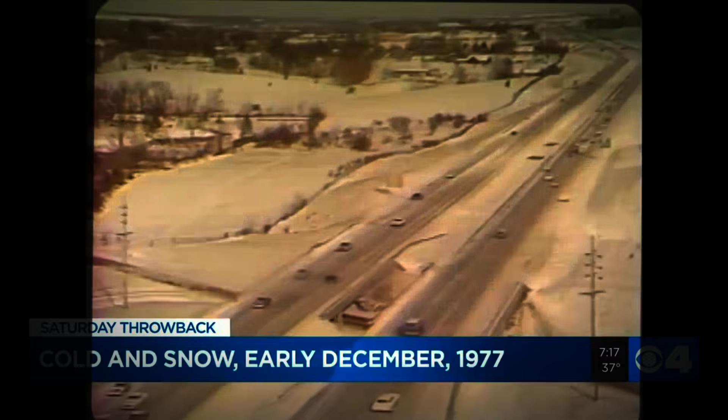In the winter of 1977, a group of homeowners in New Mexico cut their heating bills by more than half without installing a furnace, without adding insulation, and without connecting to any new energy source. They didn't burn less fuel. They stopped needing it.

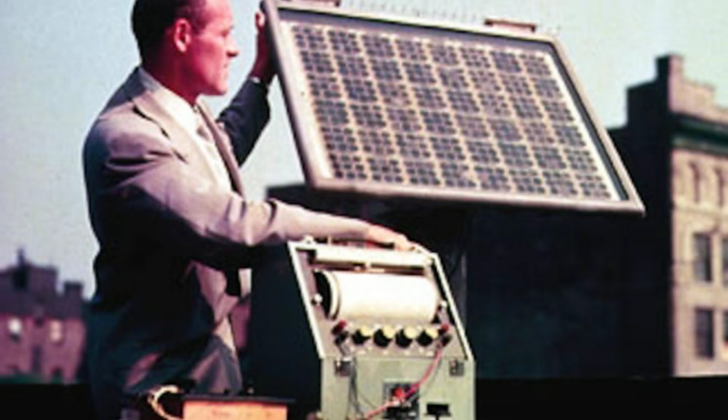The method used nothing more than sunlight, a sheet of glass, and a wall painted black. At the time, it was so effective that entire neighborhoods were redesigned around it. Universities studied it. Governments funded it.

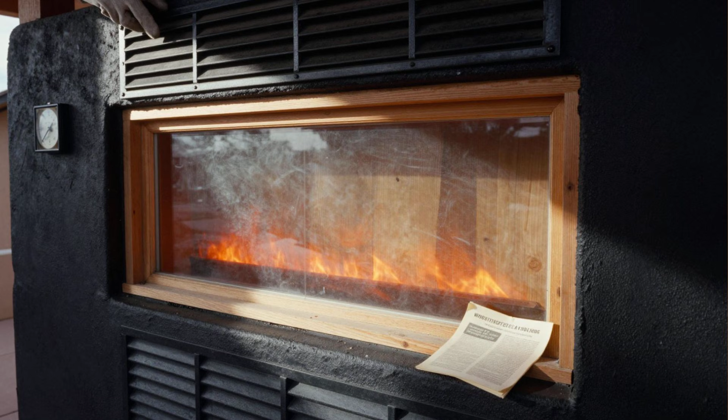Engineers called it one of the most promising energy solutions of the decade. And then it disappeared, not because it failed, but because the crisis that made it necessary ended. This is the story of the simplest heating system ever deployed at scale, how it cut energy use by up to 70%, and why almost nobody is using it today, even though the physics behind it has never stopped working.

And by the end, you will understand exactly how it works, why it was abandoned, and how it can still reduce your energy use today without changing anything about your lifestyle.

Start with the problem that forced people to rethink everything. In 1973, global oil production was disrupted during the oil crisis. Prices didn't just rise, they multiplied. Heating costs doubled, then tripled. Fuel shortages became normal. Lines formed at gas stations.

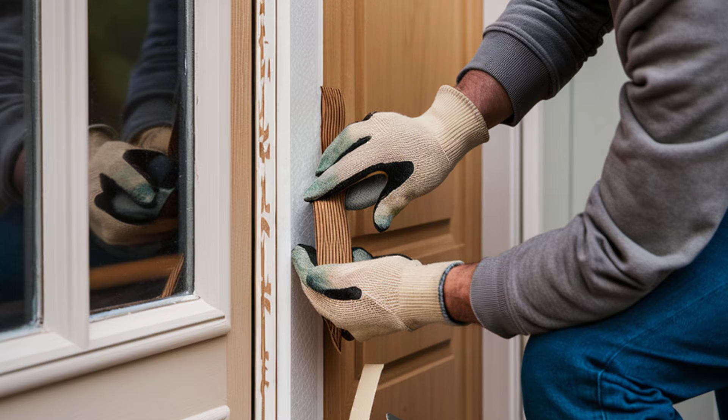In colder regions, families were forced to choose between heating their homes and affording basic necessities. For the first time in modern history, energy stopped being invisible. And when something becomes scarce, people stop assuming it will always be there. They start looking for alternatives, not theoretical ones, immediate ones. Here's what most people miss.

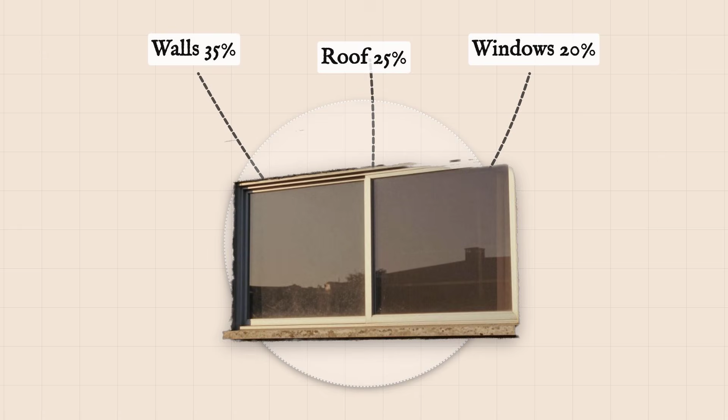The solution didn't come from new technology, it came from rethinking something older than electricity itself: heat. A house loses heat in predictable ways. Warm air rises. Heat moves toward cold surfaces. And most importantly, sunlight carries energy, a lot of it.

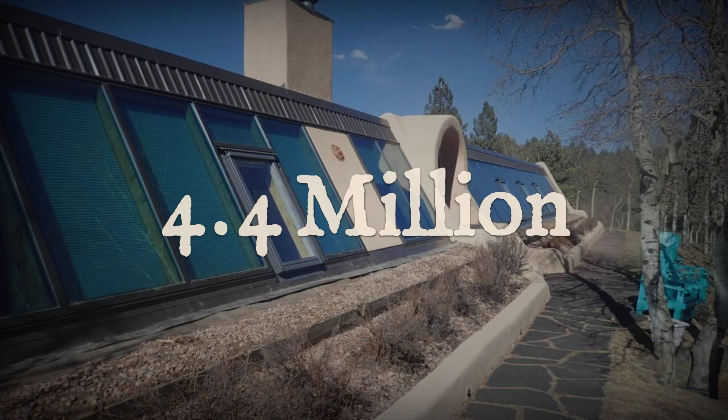On a clear winter day, sunlight hitting a surface can deliver more energy per square meter than many heating systems produce. That energy is free. It arrives every day. And before the 1970s, most homes were designed to ignore it.

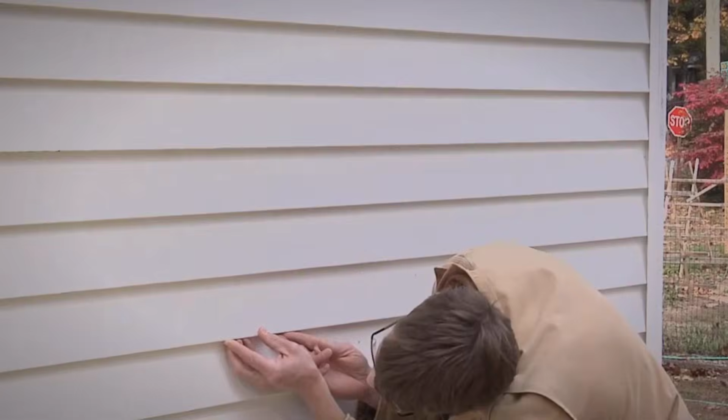The people who solved this didn't invent anything new. They removed something: the separation between the outside environment and the way a house interacts with it. The system is called a Trombe wall, named after Felix Trombe, who helped refine it in the mid-20th century. The concept existed long before that in various forms across Europe and North Africa.

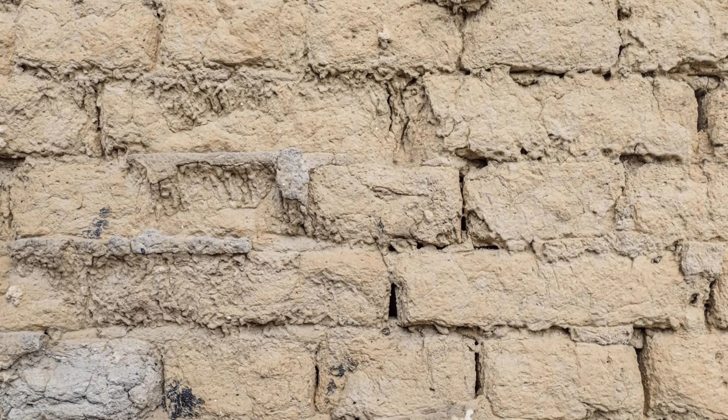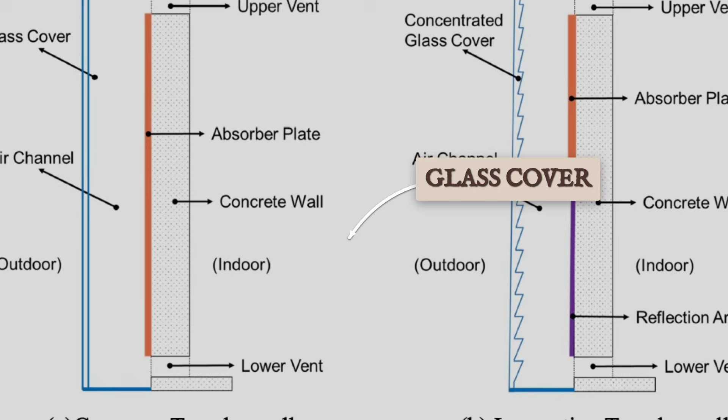The design is almost too simple. A thick wall, usually made of concrete, stone, or adobe, is painted dark to absorb heat. A pane of glass is installed a few inches in front of it, creating a narrow air gap. Sunlight passes through the glass, hits the dark wall, and gets absorbed as heat.

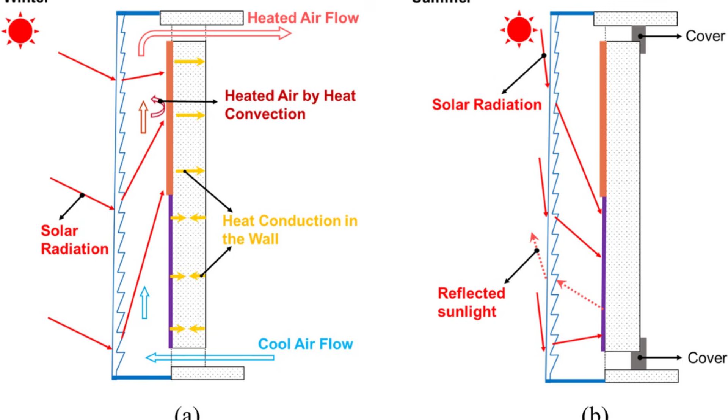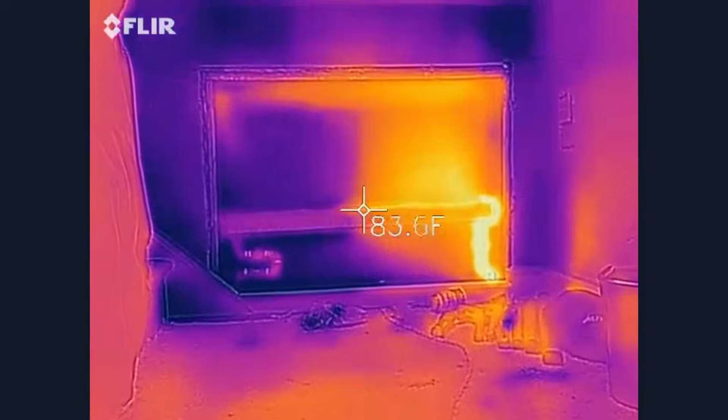But here is the critical part: the glass traps that heat. This is the greenhouse effect. Shortwave solar radiation enters easily, but once it converts to heat, it cannot escape as efficiently. So the space between the glass and the wall heats up rapidly.

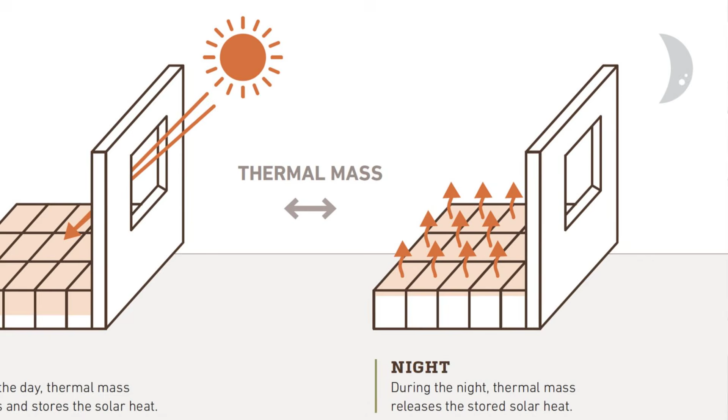Now, this is where the system becomes powerful. The wall itself is not just absorbing heat, it is storing it. Materials like concrete, stone, and adobe have high thermal mass. That means they can absorb large amounts of heat without changing temperature quickly. And more importantly, they release that heat slowly.

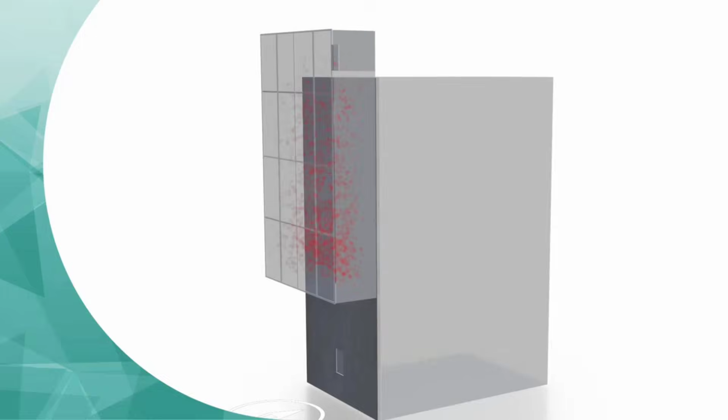During the day, the wall absorbs solar energy, but instead of heating the house immediately, it holds that energy inside its mass. Then, hours later, when the outside temperature drops, the heat begins moving inward, through the wall, into the living space. This delay is called thermal lag.

And in a properly designed system, it aligns almost perfectly with human needs. Heat collected at noon enters the home in the evening. Heat stored in the afternoon is released at night, when you need it most.

So instead of heating your house when it is already warm outside, you shift that energy to when it is cold. This changes everything, because now you are not generating heat, you are managing time.

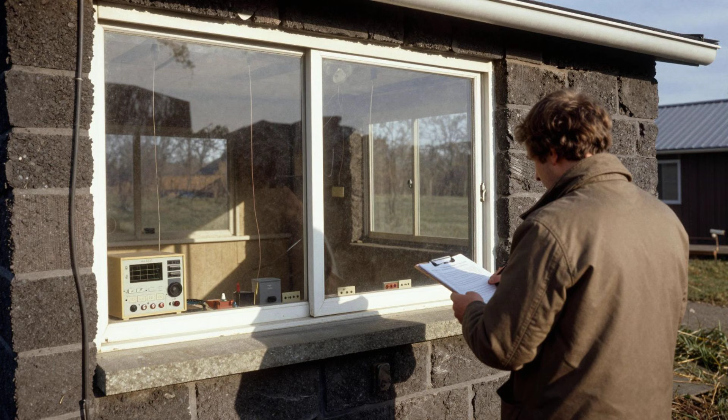Field tests in the late 1970s showed that Trombe wall systems could reduce heating demand by 30 to 70%, depending on climate and design. In some cases, homes required almost no additional heating during sunny winter periods. And unlike modern systems, there are no moving parts, no fans, no pumps, no fuel, nothing to break. The wall just sits there, doing the same thing every day. So why does every house not use this?

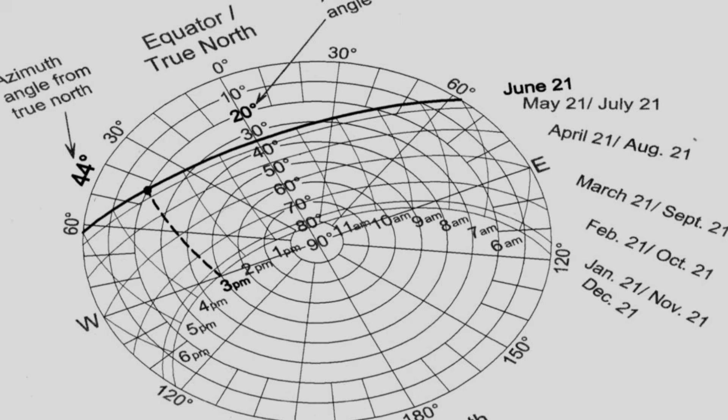Because the system only works if the house is designed around it. Orientation matters—the wall must face the sun, typically south in the northern hemisphere. Window placement matters. Insulation matters. The entire structure has to cooperate with the system, and that is where it collided with modern construction.

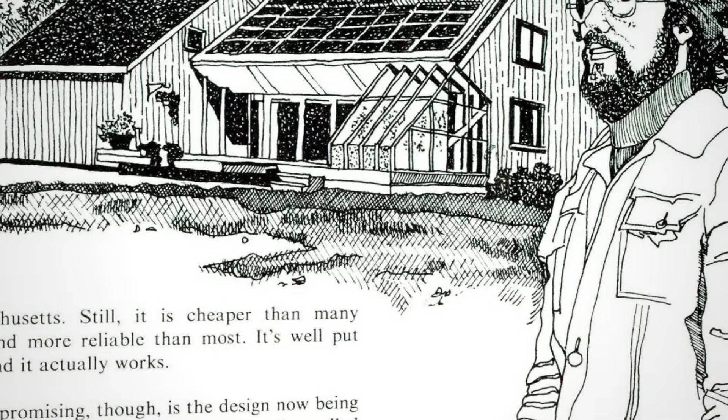After the oil crisis, there was a brief window where energy efficiency became a priority. Governments funded solar research. Architects experimented with passive design. Builders tried new methods, but then oil prices stabilized. Supply returned, and the urgency disappeared. And when urgency disappears, so does adoption. Developers return to what they knew: standardized designs, fast construction, repeatable models.

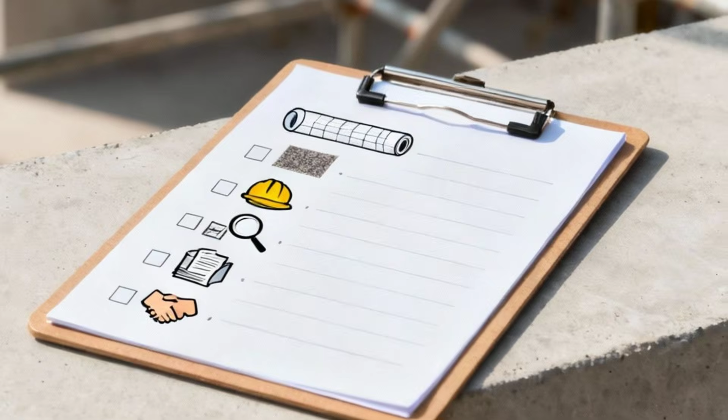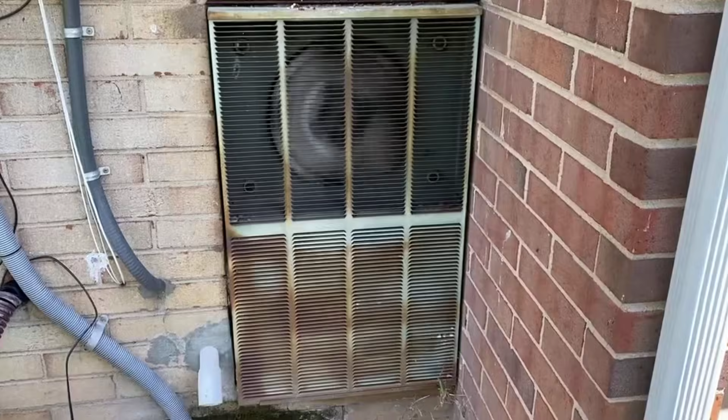A Trombe wall is not difficult to build, but it requires thought, planning, customization, and that slows things down. A developer building 200 identical homes does not want variation. They want predictability. So instead of redesigning houses to use less energy, the industry chose to add systems that produce more: furnaces, air conditioning, heating, ventilation, and air conditioning systems. It is easier to install a machine than redesign a building, and machines can be sold, maintained, replaced, upgraded. A wall cannot. This is where the shift becomes economic.

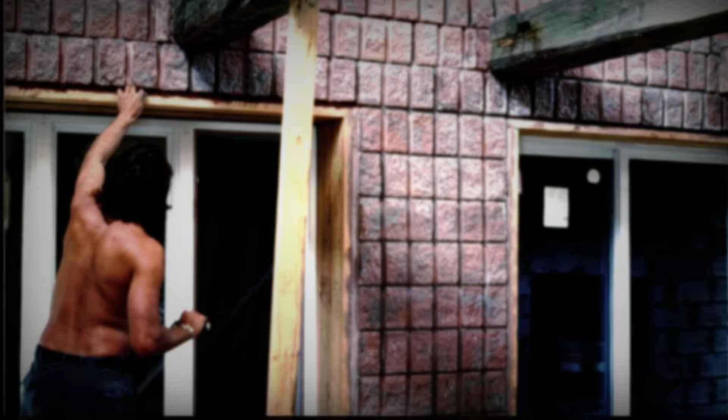The global heating, ventilation, and air conditioning industry is worth hundreds of billions of dollars. Every home built without relying on mechanical heating reduces demand for that system. A passive system removes the need for fuel. It removes the need for maintenance. It removes recurring cost, and that makes it invisible in a market built on continuous consumption.

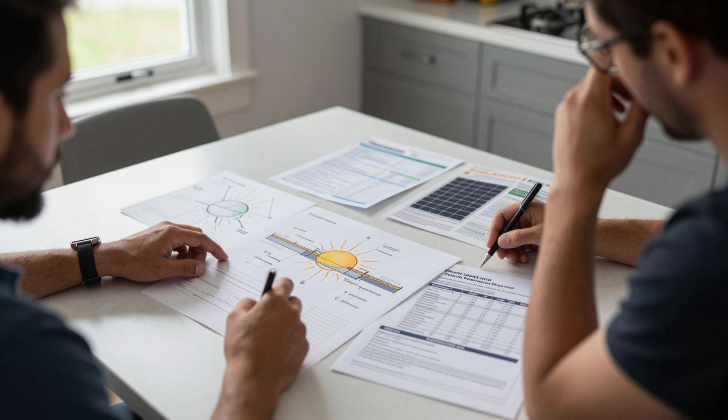So instead of improving passive design, we improved machines. And over time, the knowledge faded—not completely, but enough that most homeowners have never heard of it, even though the physics has not changed. Sunlight still delivers energy. Thermal mass still stores it. Heat still moves from hot to cold. And a wall still works whether or not anyone is thinking about it.

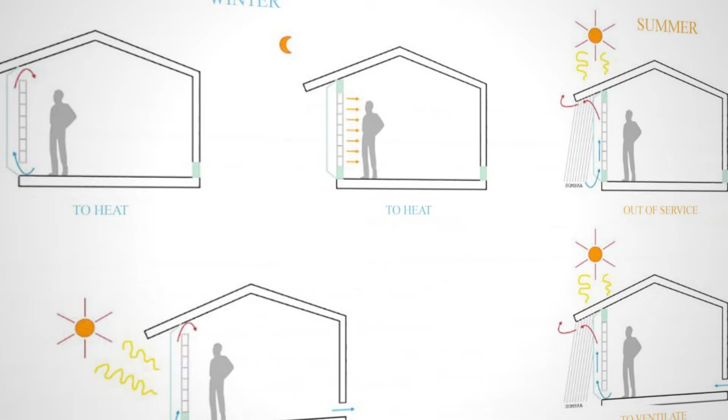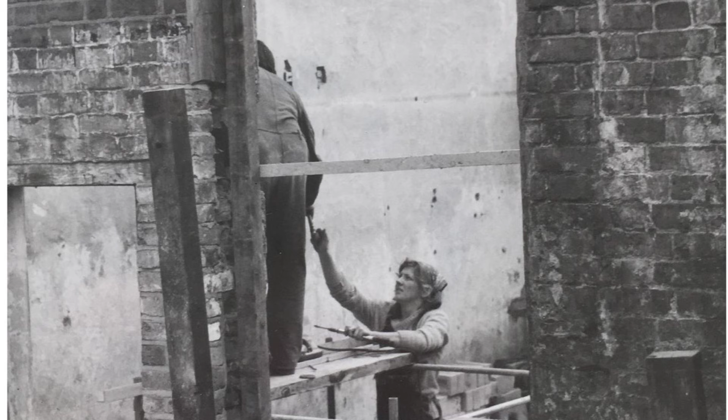There is another layer to this, because the Trombe wall is only one part of a larger system. In the 1970s, architects were not just adding walls. They were redesigning entire homes to work with the environment. Windows were placed to capture winter sun and avoid summer heat. Roof overhangs were calculated to block high-angle summer sunlight while allowing low-angle winter light. Materials were selected not just for cost, but for how they stored and released energy.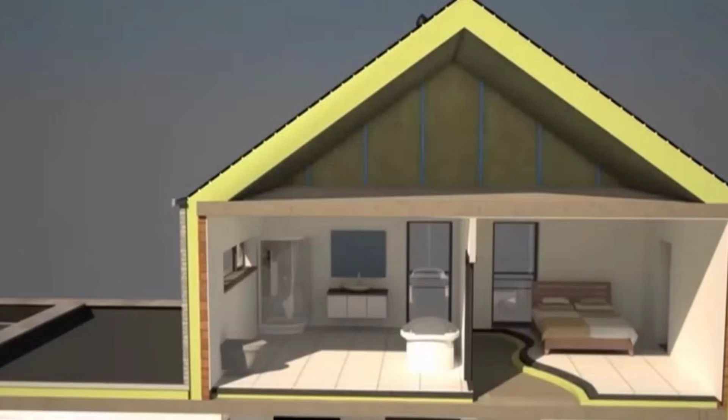This approach is called passive solar design, and when it is done correctly, it can reduce total energy use by more than half—not through technology, but through alignment. The house works with the environment instead of fighting it. Modern buildings do the opposite. They isolate the interior from the exterior, and then they use energy to recreate a controlled environment inside. It works, but it is expensive, and it creates dependency, because the system only functions as long as energy is available. A passive system continues working regardless.

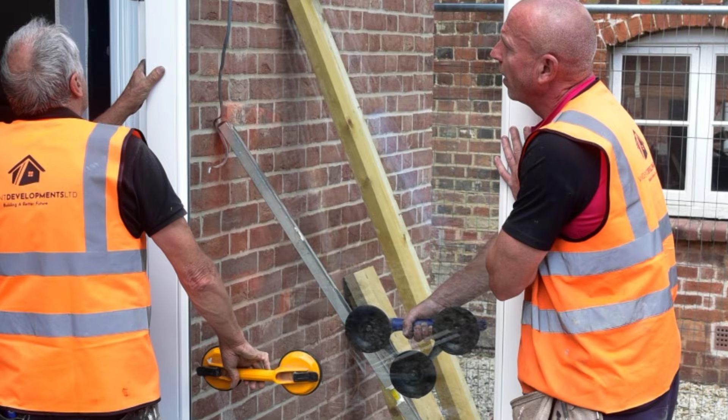That difference is subtle, but it is everything. Not just how this system works, but how to apply it: the exact dimensions, the materials, the mistakes that make it fail, and why a method that once cut energy use in half is now being quietly rediscovered by architects who are building homes that cost less to run than they did 50 years ago. And more importantly, how you can use the same principle even if your house was never designed for it. Now we get into the part that most people expect to be complicated.

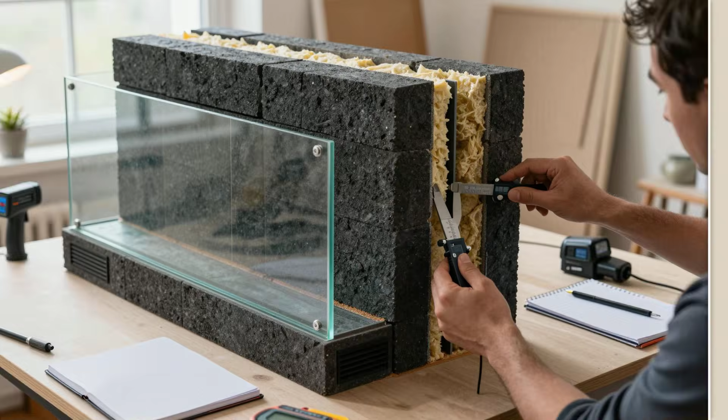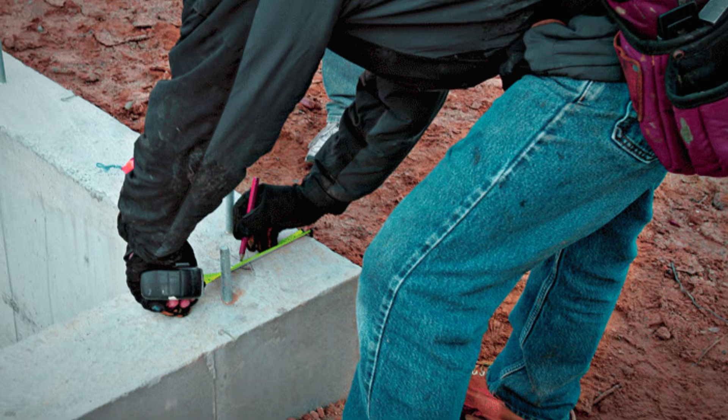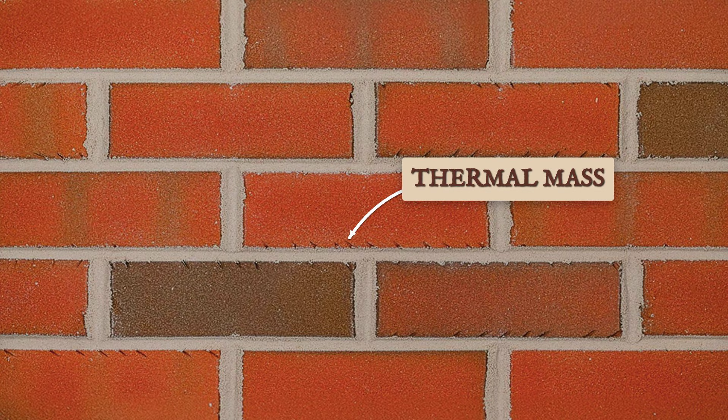It is not. The entire system comes down to 3 variables: surface, mass, timing. If you understand those, you understand everything. Start with the wall itself. A proper Trombe wall needs thickness, not decoration, not drywall—mass. Typically between 8 and 16 inches of material like concrete, brick, or adobe.

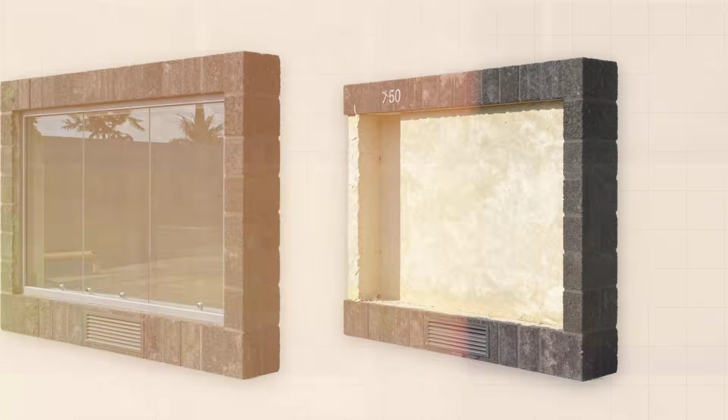The reason is simple. Thin materials heat up quickly and cool down just as fast. They do not store energy. They react to it. A thick wall does the opposite. It absorbs energy slowly, holds it, and releases it over time. That delay is what makes the system useful. Without it, you are just heating the house during the day when you do not need it.

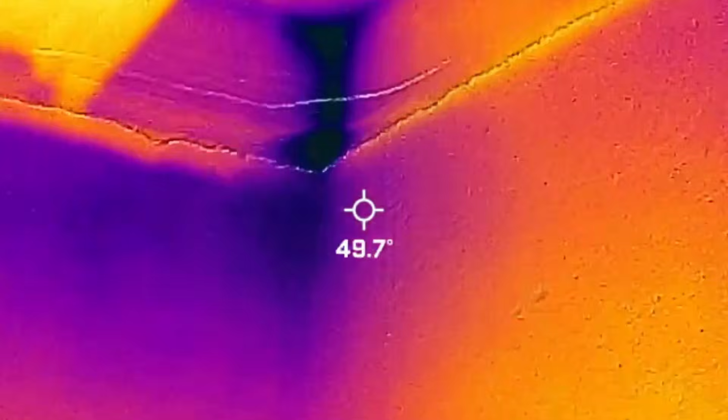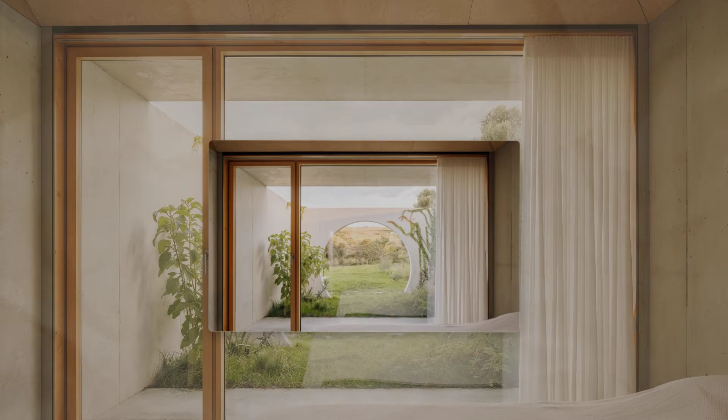Now add the glass. This is where most people make their first mistake. The gap between the glass and the wall matters. Too wide and heat escapes. Too narrow and airflow becomes restricted. The sweet spot is usually between 2 to 4 inches. That small space traps heat efficiently while still allowing controlled air movement. Because yes, air movement is part of the system. Some designs include vents at the top and bottom of the wall.

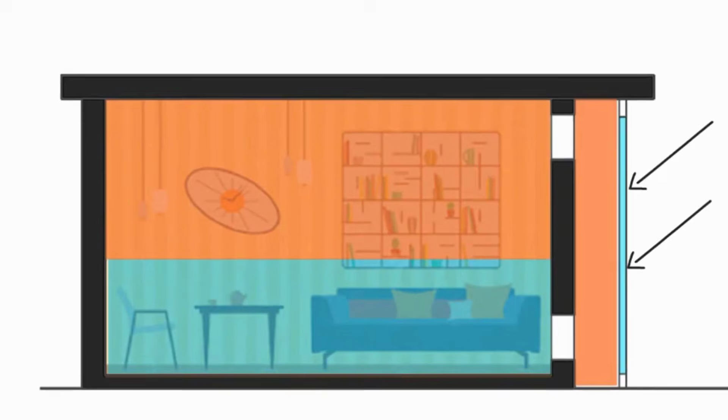As the air in the gap heats up, it rises. Cooler air from inside the house is pulled into the lower vent, heated, and returned through the upper vent. This creates a natural convection loop. No fan, no electricity, just physics.

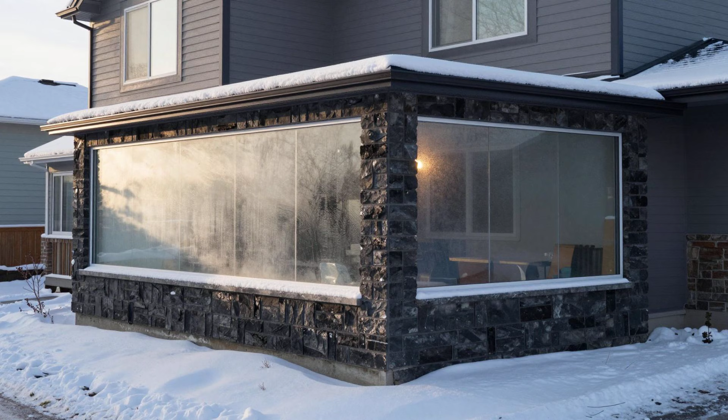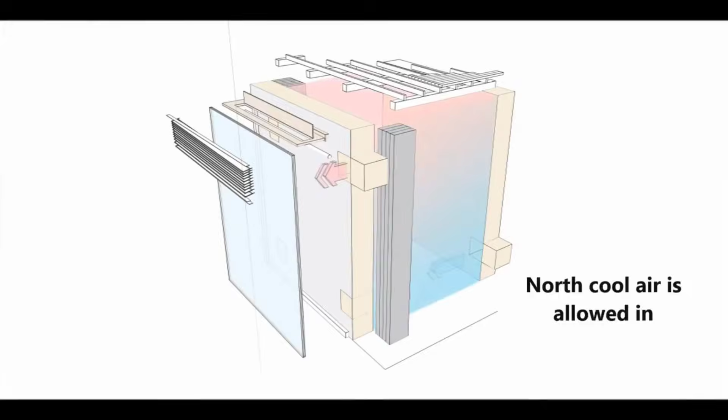But here is the important detail. Those vents are optional, and in colder climates they are often avoided, because while they move heat faster, they also lose heat faster once the sun goes down. A sealed system stores heat better. A vented system distributes heat faster. That is a trade-off, and most modern implementations choose storage over speed.

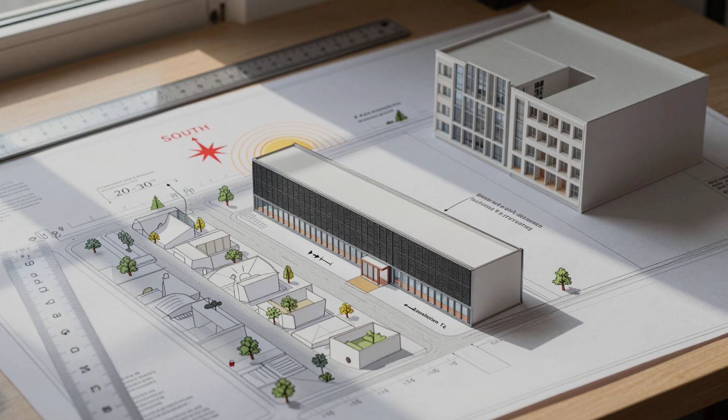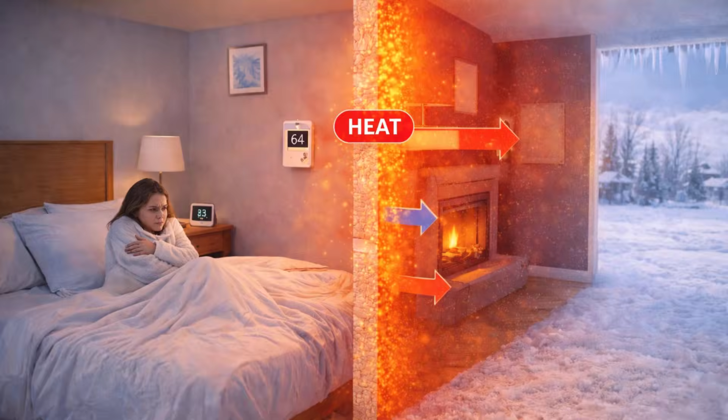Now, orientation. This is not flexible. If the wall does not face the sun, it does not work. In the northern hemisphere, that means facing south. Even a deviation of 20 to 30 degrees can reduce performance significantly, because winter sunlight comes at a low angle. If you miss it, you lose the entire system. This is why the method disappeared from mainstream construction, not because it failed, but because it requires alignment.

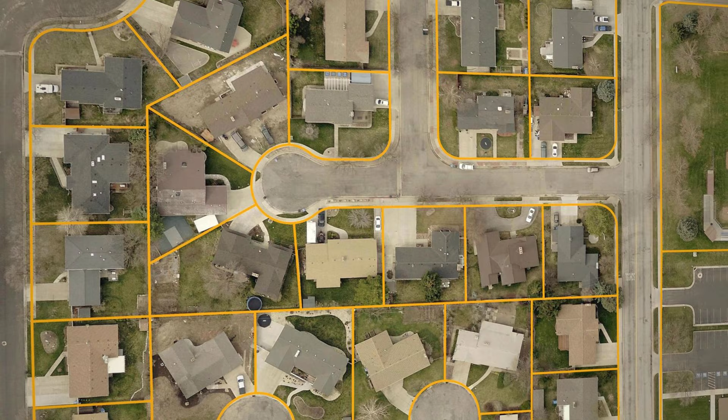Modern housing developments are not designed around the sun. They are designed around roads, lot divisions, and maximum density. So even if you understand the system, you often cannot use it fully.

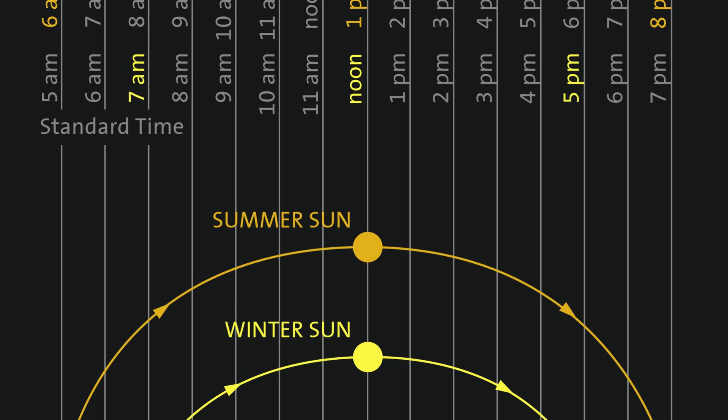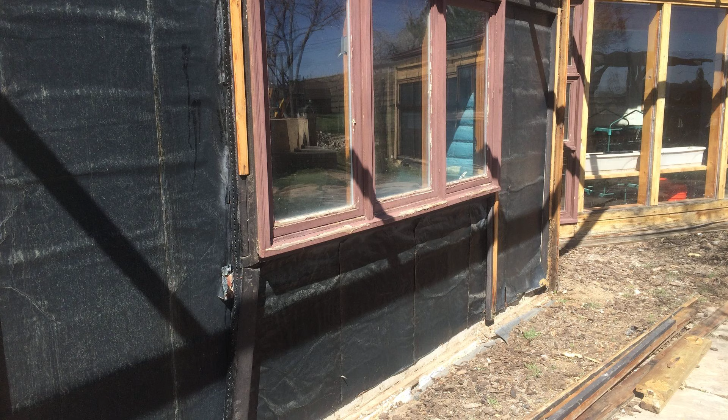Now, let's talk about the timing. This is where the system becomes precise. A well-built Trombe wall has a thermal lag of about 8 to 12 hours. That means the sun hits the wall around noon and heat enters the house between 8 p.m. and midnight. That is not accidental.

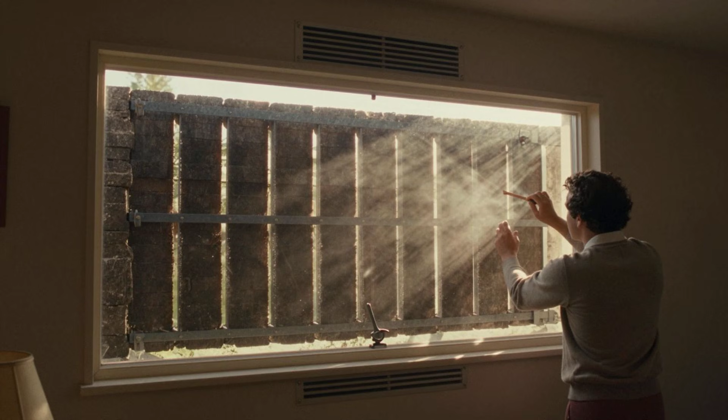That is the goal. If your wall is too thin, the heat arrives too early and you end up overheating during the day. If your wall is too thick, the heat arrives too late and you lose it before you need it. So the system is not just about collecting heat. It is about delivering it at the right time.

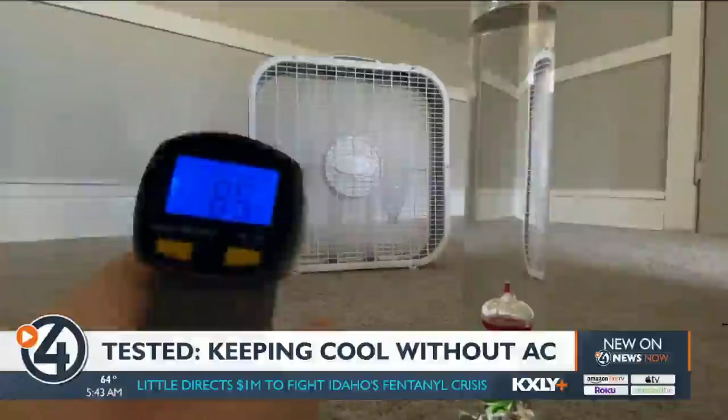Now here's the part most people overlook. Summer. If you build this system incorrectly, it will overheat your house, because the same wall that traps heat in winter will trap heat in summer.

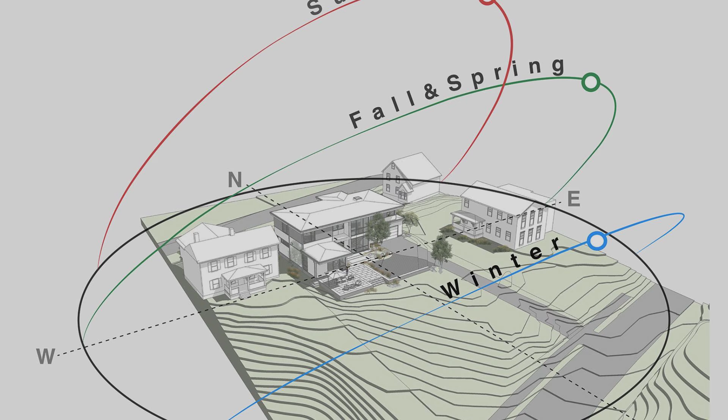This is where shading becomes critical. A properly designed roof overhang blocks high-angle summer sun, but allows low-angle winter sunlight to reach the wall. This is not guesswork. It's geometry. At higher sun angles, the overhang casts a shadow. At lower angles, sunlight passes underneath it. So the same wall that heats your house in winter does nothing in summer. No switching, no controls, no adjustments, just design.

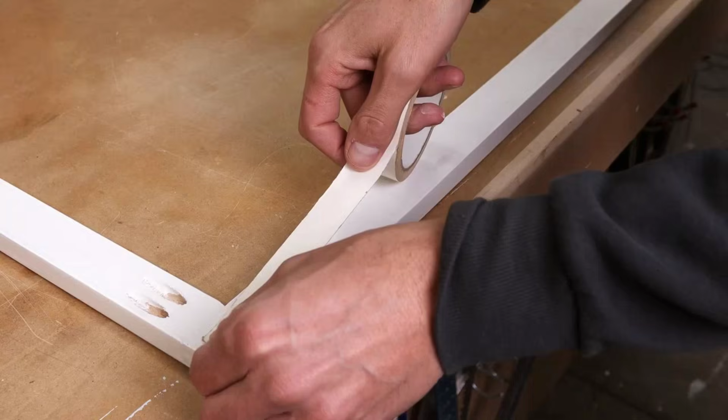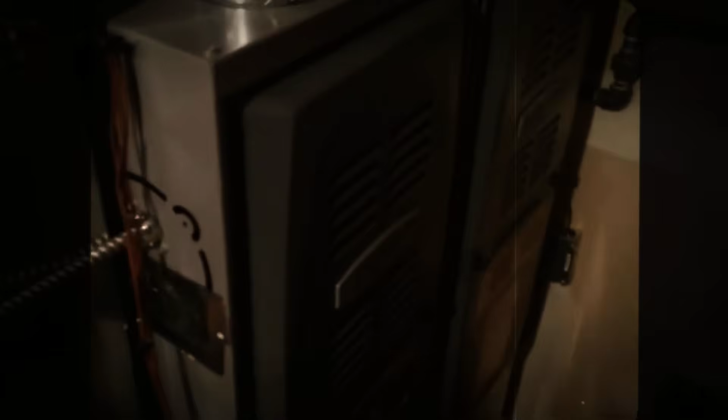Now let's address the biggest misconception, that you need to build a new house to use this. You do not. You can retrofit parts of this system, not perfectly, but effectively. For example, a simplified version can be created using a sun-facing wall, a dark surface, a glass panel placed a few inches in front. Even this basic setup can create measurable heat gain. It will not replace your heating system, but it can reduce how often it runs.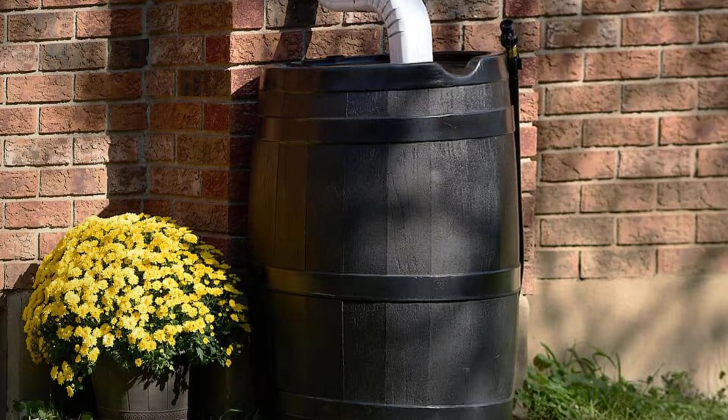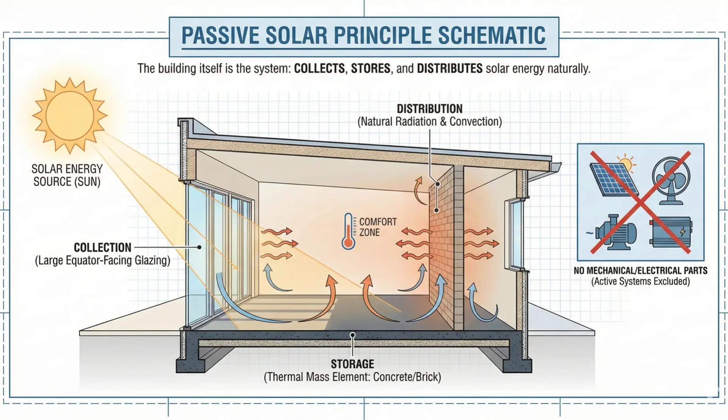Another approach, thermal mass inside the house. Materials like brick, stone, or even water containers placed in direct sunlight can absorb heat during the day and release it at night. This is the same principle, just applied differently, and it works.

Now step back. This is where everything connects. The Trombe wall is not just a trick, it is a reminder that energy efficiency does not always come from producing more energy. Sometimes it comes from using what is already there. The 1970s forced people to think this way because they had no choice. Today, energy is available again, so the urgency is gone. But the math has not changed.

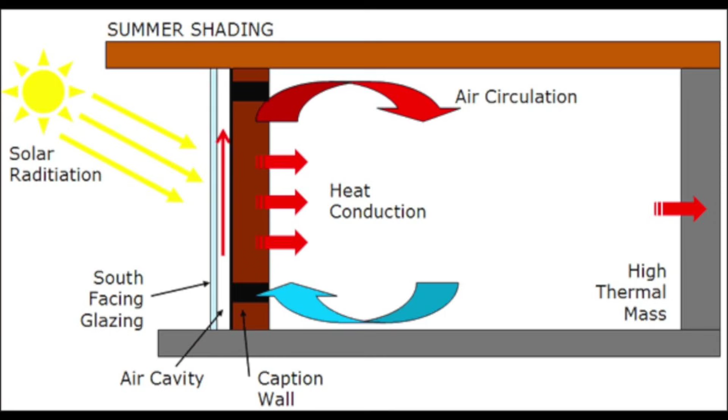Sunlight still hits your house every day. Heat still moves the same way. Materials still behave the same way. And a wall still does not need maintenance, fuel, or replacement. So the real question is not whether this works. It already did, at scale, under pressure, with measurable results.

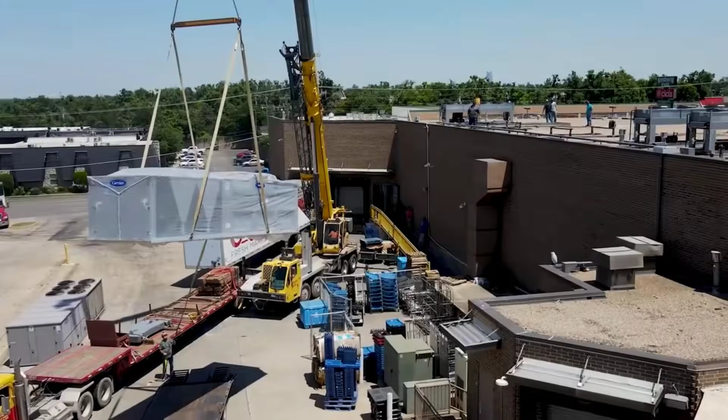The real question is, why did we stop designing buildings that reduce energy demand and start designing systems that increase it? Because once you see that shift, you start noticing it everywhere. And once you understand that, you stop looking for better machines and start looking for better systems.